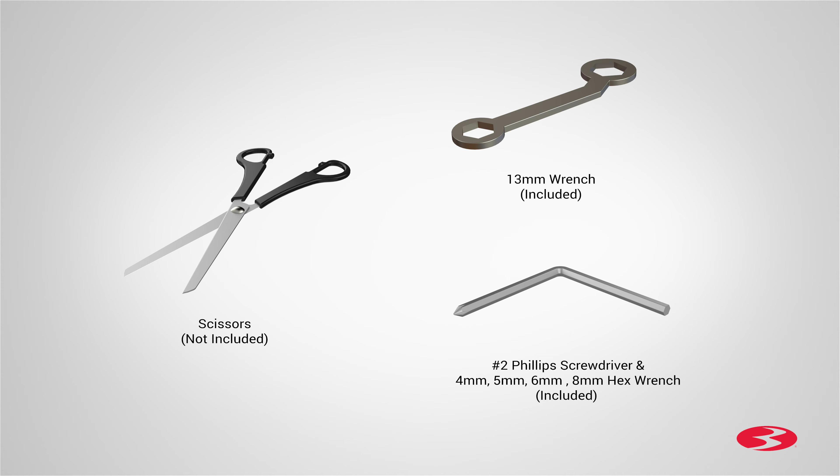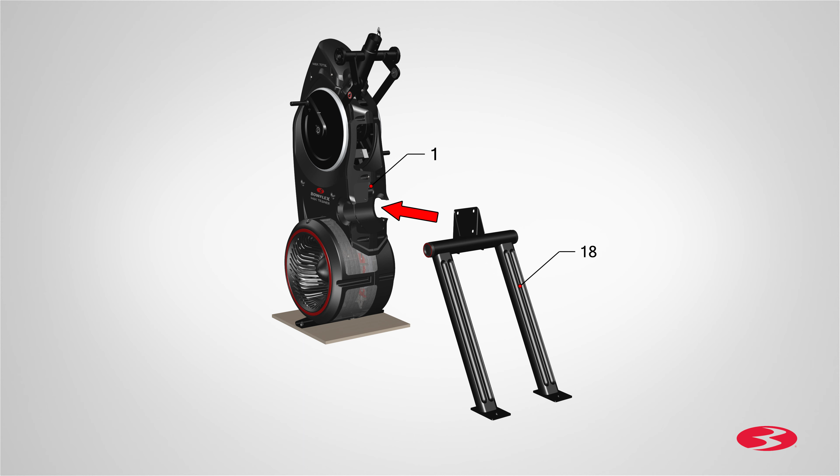Step 1. Attaching the rail assembly. It is recommended that someone assist you with this step. Begin step 1 by attaching the rail assembly, part number 18, to the back side of the frame, part number 1. Slowly push the rail assembly towards the frame and match the top holes as shown.

Next, using 4 part A screws, 4 part B lock washers, and 4 part C washers, secure the rail assembly to the frame. Place the part C washer first, followed by the B lock washer and part A screws. Only hand tighten the hardware at this time, as you will need to fully tighten the hardware at a later step.

Finally, using the provided 13mm double box wrench, release the frame from the shipping plate by removing the hardware located on each side of the frame. Repeat these steps for the opposite side and remove the hardware on both sides of the frame. Step 1 is now complete.

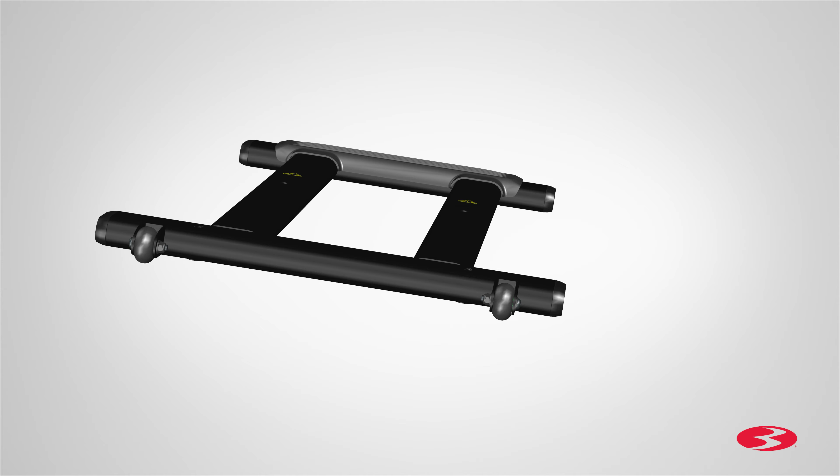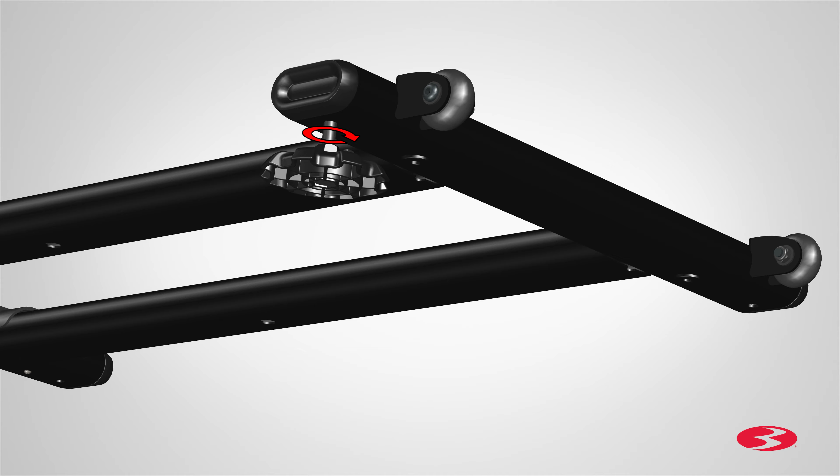Step 2. Attaching the levelers to the stabilizer assembly. Begin step 2 by locating stabilizer assembly, part number 14. Next, locate 1 part 16 leveler and attach it onto the stabilizer assembly. Insert the leveler as shown, and rotate the leveler clockwise to fully tighten. Repeat these steps and fully tighten all 4 levelers.

The levelers might require adjustment to level the machine. Make sure to follow the instructions in the assembly manual when leveling the machine. Step 2 is now complete.

Step 3. Attaching the frame assembly to the stabilizer assembly. It is recommended that someone assist you with this step. Begin step 3 by carefully lifting the frame assembly from the shipping plate. Place the shipping plate aside and place the frame on top of the stabilizer assembly, part number 14. Slowly set the frame in place, matching the frame holes to the holes in the top of the stabilizer assembly.

Next, secure the stabilizer using 4 part D screws and 4 part E washers. Hand tighten the screws for now.

After all hardware has been hand tightened, proceed by fully tightening all hardware from previous steps. You will require the provided 6mm Allen wrench to fully tighten the 4 part A screws that were previously used on step 1. Fully tighten all hardware. Finally, fully tighten the bottom hardware using the provided 8mm Allen wrench.

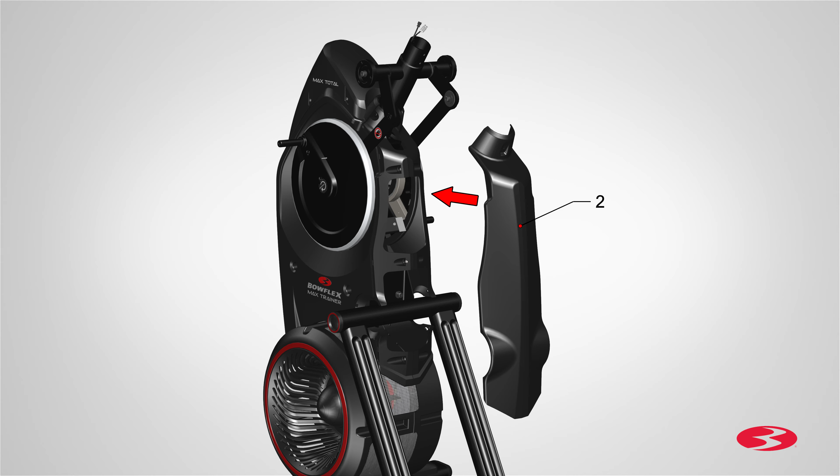Step 5. Attaching the rear shroud and caps. Begin Step 5 by attaching the rear shroud, part number 2, onto the frame assembly. To attach the rear shroud, place the inside hook of the rear shroud on the frame assembly and then pivot it up into place. Secure the shroud using one part F screw. Place the screw on the top hole as shown and tighten the screw using the number 2 Phillips screwdriver.

Next, attach two part number 17 caps on each side of the frame assembly. Gently push the cap into position. Repeat these steps for the opposite side. Step 5 is now complete.

Step 6. Attaching the legs to the frame assembly. Be aware that the legs are connected, and when either of the legs move, the other does as well. Begin Step 6 by placing one part I wave washer on the top post. Next, push the part 11 leg onto the top post and place the bottom part of the leg onto the rail assembly.

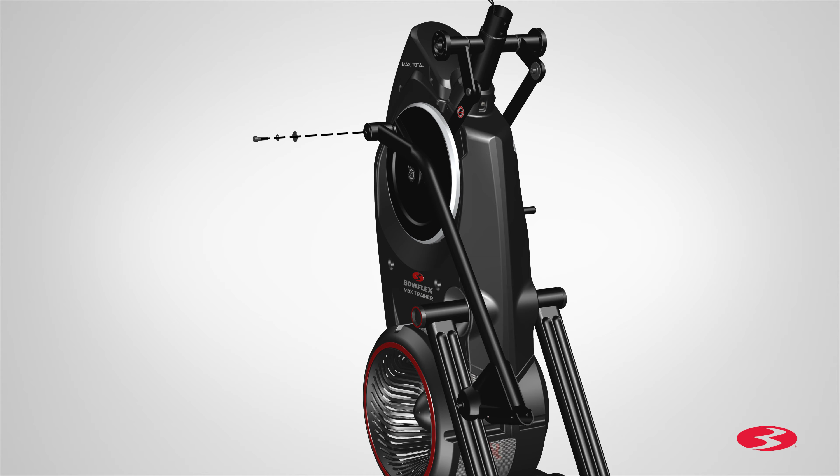Secure the leg to the frame assembly by using one part A screw, one part B lock washer, and one part G washer. Fully tighten the screw by using the provided 6mm Allen wrench.

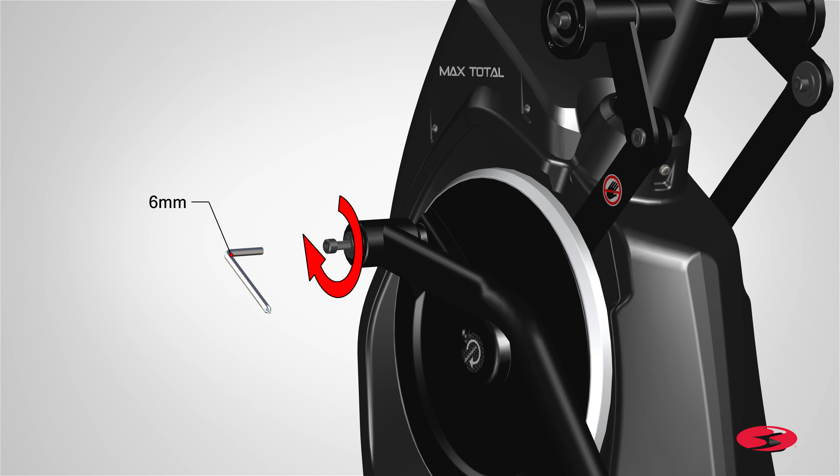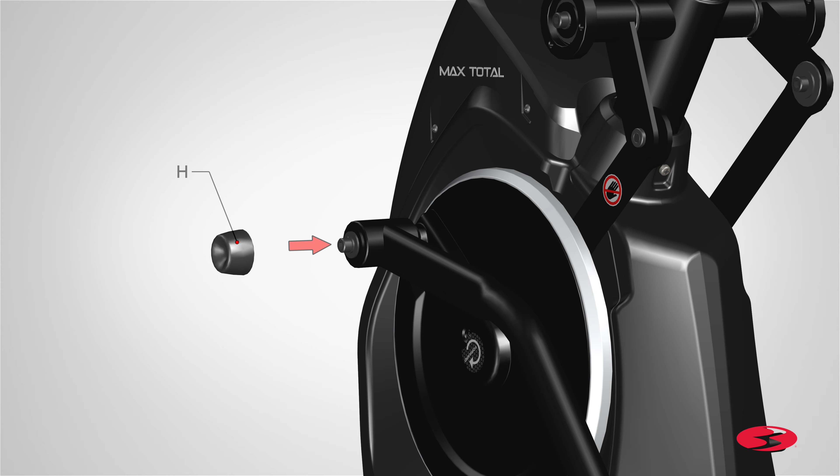Finally, cover the hardware using one part H cap. Push the cap into position. Repeat these same steps for the opposite side. Once both legs have been tightly secured, Step 6 is now complete.

Step 7. Attaching the pedals. Begin Step 7 by placing one foot pedal, part number 15, onto the left leg assembly. Slowly insert the tube ends of the pedal onto the leg assembly. Be careful to avoid fingers and hands being caught or pinched.

Secure the pedal by using two part J screws with two part C washers on one side and two part C washers with two part K lock nuts on the other side.

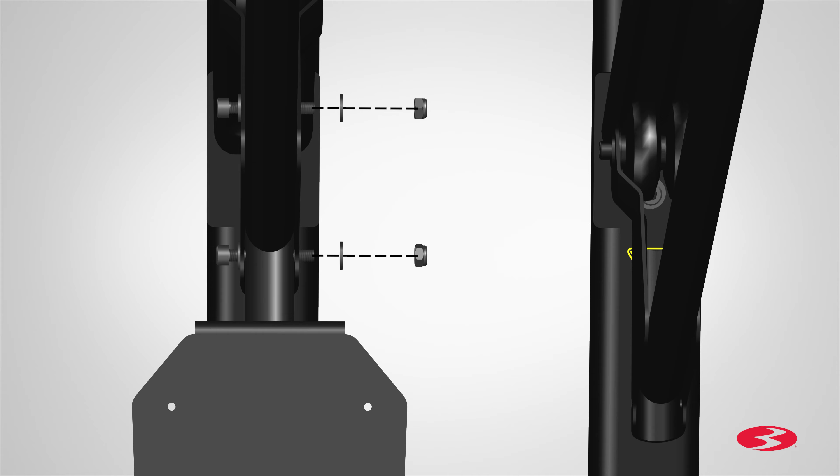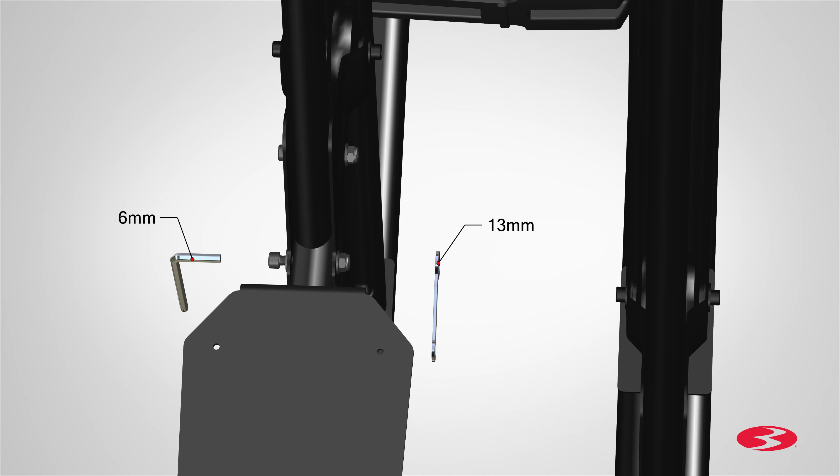Fully tighten the lock nuts using the provided 13mm double box wrench, and tighten the screws using the provided 6mm Allen wrench. Repeat these steps for the opposite side and attach the second pedal to the right leg frame assembly.

Step 7 is now complete.

Step 8: Attaching the foot platforms. Begin by locating one part 4 foot pad. Before placing the foot pad onto one of the pedals, use a pair of scissors to cut the plastic zip ties from the pads. Remove the zip ties and separate the foot pad insert, part number 3, from the foot pad. Gently lower the foot platform onto the pedal.

Next, insert one foot pad onto the foot platform. Gently lower the foot pad and insert it into place.

Next, secure the foot pad using 4 part L screws. Insert the screws through the foot pad and through the pedal. Fully tighten all screws using the provided 4mm Allen wrench.

Repeat these steps for the opposite side and secure the second foot platform and pad. Step 8 is now complete.

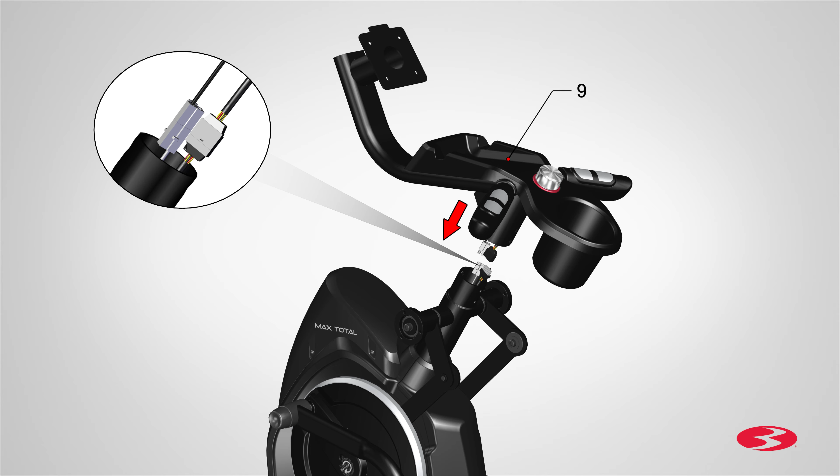Make sure all cables are correctly connected and latched securely together. Next, place and hold the static handlebar assembly, part number 9, on top of the frame assembly. Slowly insert the static handlebar assembly into the frame assembly without crimping the cables.

Next, secure the static handlebar assembly using 4 part M screws, 4 part N lock washers, and 4 part O flat washers. Insert 2 sets of hardware through the front and hand tighten the hardware for now. Repeat these steps for the opposite side.

After all hardware has been hand tightened, fully tighten the hardware using the provided 5mm Allen wrench. Make sure to fully tighten the hardware on both sides.

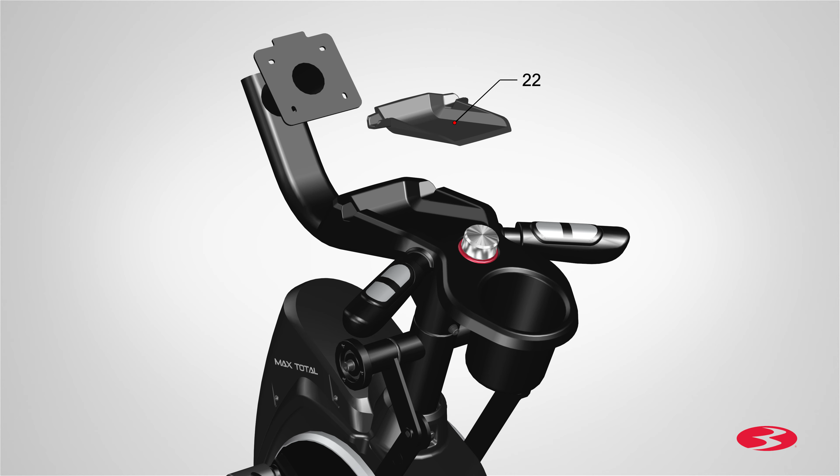Finally, locate the tray insert, part 22, and place it on the static handlebar assembly. Slowly lower and insert the tray into place. Step 9 is now complete.

Step 10: Attaching the console assembly. Begin by locating the console assembly, part 6. Next, locate and remove the console rear cover from the console assembly.

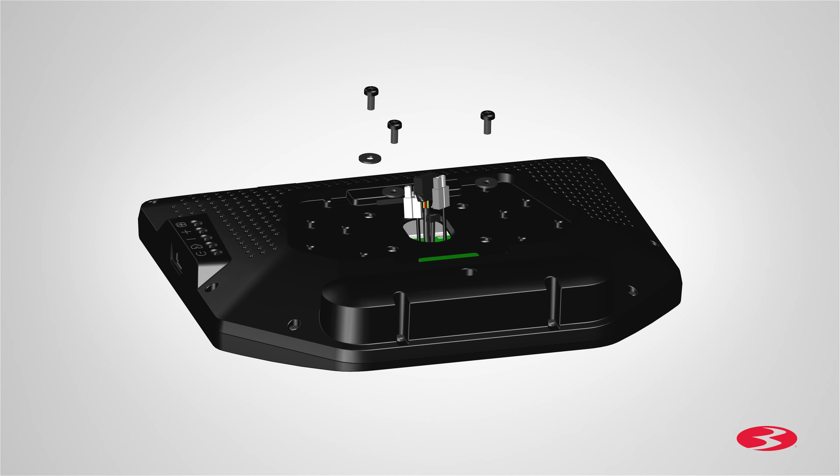Using the number 2 Phillips screwdriver, remove the hardware. Set the screws and washers aside for now. Next, place the console onto the static handlebar and connect the console assembly cables with the frame assembly cables.

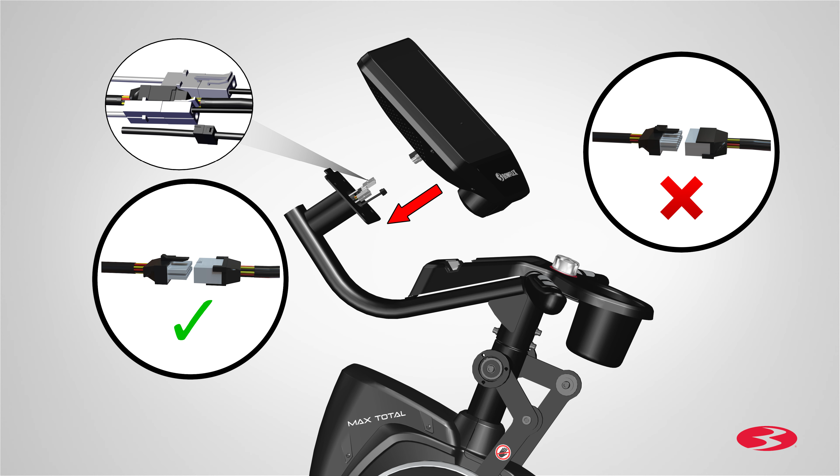Each cable connector, 3-pin, 4-pin, 5-pin, and 12-pin, has a corresponding end connector with that many openings. Connect the static handlebar assembly cables with the frame assembly cables. Make sure all cables are correctly connected and latched securely together.

After attaching all cables, pivot the console assembly downwards to secure it to the static handlebar assembly. Do not cut or crimp the cables. Secure the console assembly to the static handlebar using the previously loosened hardware found in the console assembly at the beginning of the step. Tighten the hardware using the number 2 Phillips screwdriver. Take care not to over-tighten the screws.

Next, reattach the console rear cover, part number 7, to the back of the console assembly. Gently push the cover into place. Finally, attach the static handlebar cap, part number 8, to the top of the static handlebar assembly. Gently push the cap into place. Step 10 is now complete.

Step 11: Attaching the upper handlebars. It is recommended that someone assists you with this step. Begin by locating the left dynamic handlebar, part number 10, and placing it on the left side of the frame assembly. A right R and a left L have been applied to the parts to assist with assembly.

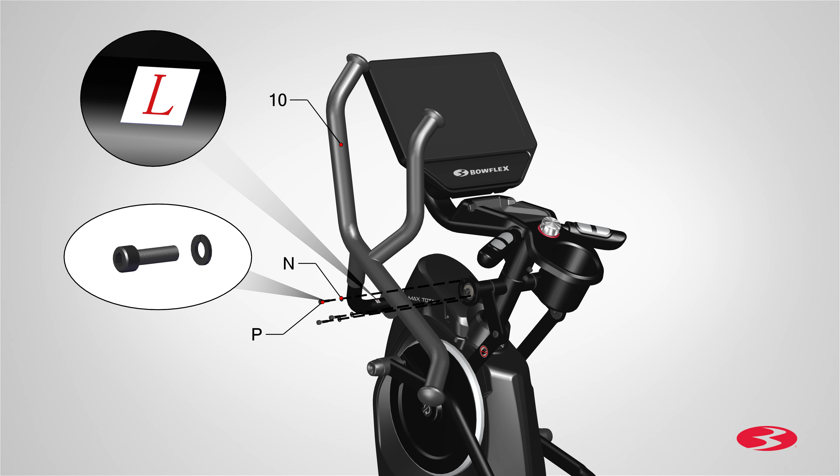Be aware that the pedals and the upper handlebars are connected, and when either of these parts move, the other does as well. Secure the dynamic handlebar using 3 part P screws and 3 part N lock washers. Push and hold the handlebar into place. Hand tighten the hardware and then tighten securely using the provided 5mm Allen wrench.

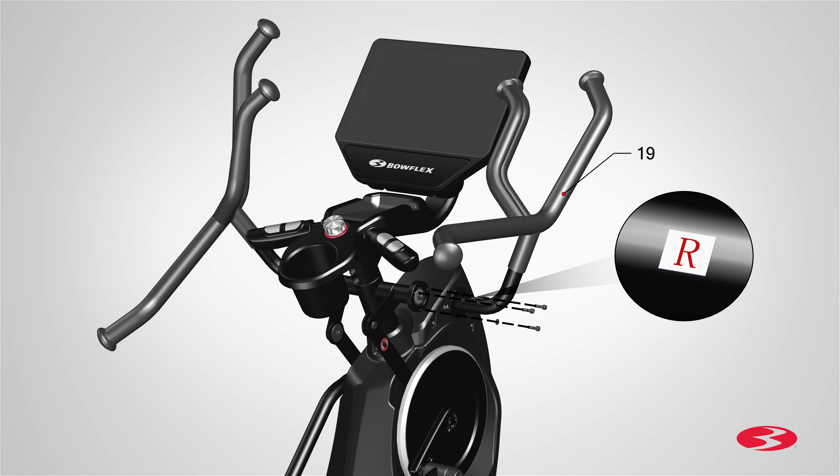Repeat these steps on the opposite side and attach the right dynamic handlebar, part number 19, onto the frame assembly. Make sure the upper handlebars were attached so that they are in the range of operation for the user. Step 11 is now complete.

Step 12: Connecting the AC power adapter. Begin by placing the AC adapter, part number 21, to the front near the bottom of the frame assembly. First, connect the power adapter to the plug on the front base of the machine. Press firmly on the adapter until it snaps into place.

Next, connect the power cord to the AC adapter and to the wall outlet. Make sure that the power adapter wire stays clear of all moving parts. Congratulations! You have now completed the assembly of the Max Total 16.

Before using the machine, please make a final inspection. You can now remove any protective covers from the face of the console, as well as the plastic scratch guard strips from the rails.

Please inspect the machine to ensure that all fasteners are tight and components are properly assembled. Do not use until the machine has been fully assembled and inspected for correct performance in accordance with the assembly manual. Please reference the assembly manual for workouts, troubleshooting, and other program features. Enjoy your new Max Total 16 fitness machine.